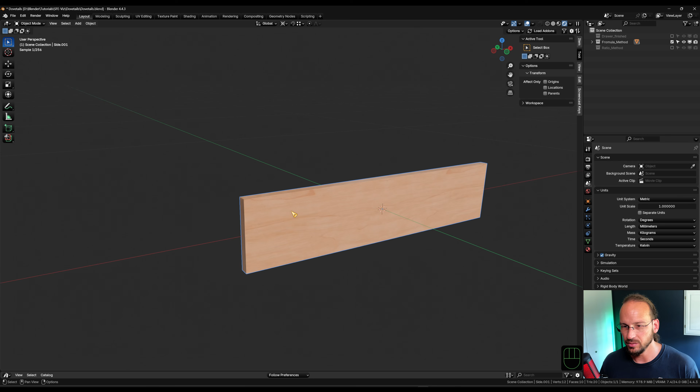So I'm going to get rid of my finished drawer here and bring in a new piece. I'm going to use booleans for all of this, so I've got to make some cutter objects. I'm going to select my piece here and tab into edit mode. And I have a mirror modifier on here.

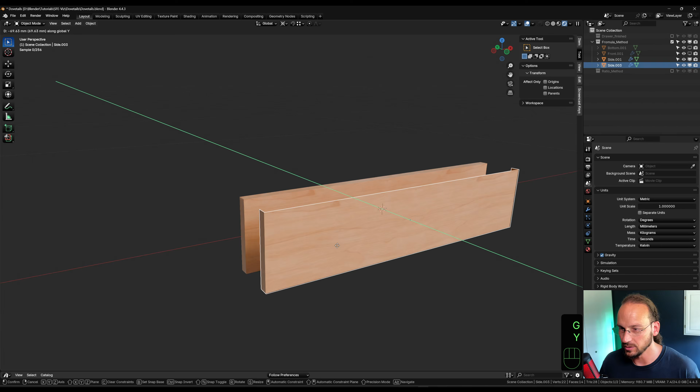That's why it ends right here. So I'm going to select these two faces here and Shift D to duplicate them, P to separate that selection, and go back into object mode. Now in my collection here I have a new object, which I'm going to bring forward a little. That is what I'm going to use as a cutter object. I'm going to get rid of the mirror modifier on here, won't be needing that. I'm also going to go into solid view for the time being.

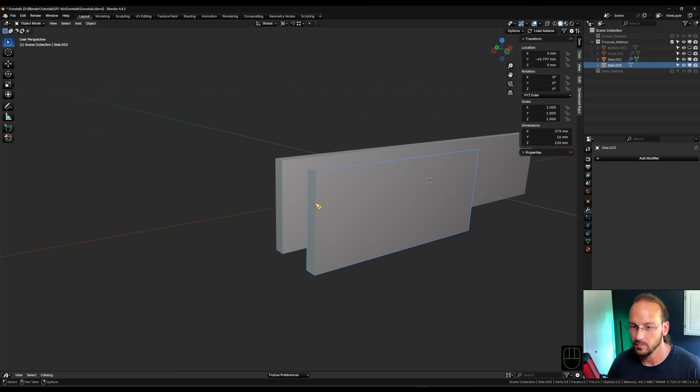Now the first thing we need to do is carry the thickness of our board into the length of the board 3 times. So if we look at our dimensions here, the thickness of the board is 16 millimeters. I'm going to use the outset tool for it. Tab into edit mode, select my face here at the end. Actually, I'm going to go into edge mode quickly and clear the seams here. So in face mode, I to inset, O to outset, equal for the advanced mode, 16 times 3.

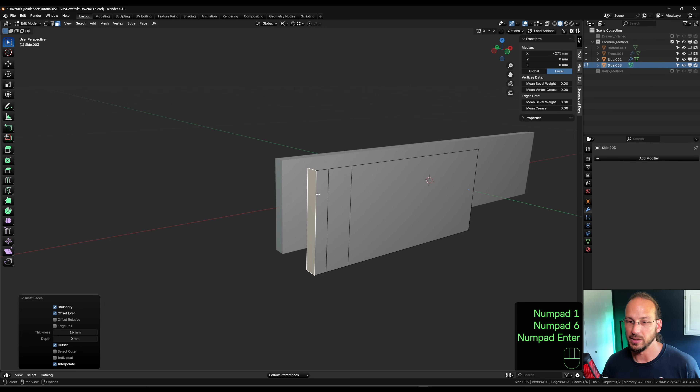Then, of course, I need the simple thickness, because when the other drawer piece comes in here, that is also 16 millimeters thick. So again, I to inset 16, and there is my simple thickness. Now I need to do this one more time for half the thickness, so I, 8, enter. Then I can get rid of that face, and I can also get rid of the vertices at the end here now. So X, delete those vertices.

Go into front view, and now we need to establish 3 things. We need the number of dovetails, we need the number of pins, and we need to know how to divide our piece. So let's start with the number of dovetails, and that's where the formula comes in.

So we need to take the width of our board, which is, if we tab into object mode, 120 millimeters. So we need to take 120 - I already apologize for my glorious writing here - and we need to divide that by 3 times half the thickness. So 3 times half, T for thickness, so that right now would be 16. So that's 8 times 3 is 24. 120 divided by 24 makes 5. So we have 5 dovetails.

The next piece of information we need is the number of pins, which is pretty simple because there's always one more pin than dovetails. So with 5 dovetails, we have 6 pins. Lastly, we need to know how many parts we have to divide our board into. Every pin is 1 part and every dovetail is 2 parts - they're considered split down the middle. So with 5 dovetails, we have 10 parts, plus the 6 from the pins makes 16 parts. That's how we have to divide our board here.

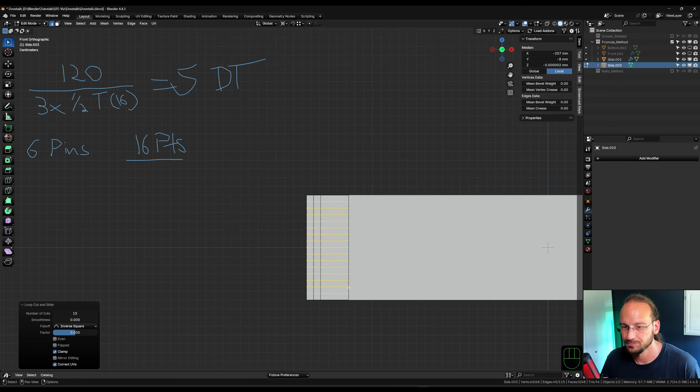And now we have 16 parts on our cutter object. From those, we can now establish the angle of our dovetails. We should do that in front mode because we can use the knife tool for it.

K to activate the knife tool. We know the first part on the bottom here is a pin, so the second edge here is the center of our dovetail. We're going to grab the vertex on the very back, then look at this vertex here, and when it turns gray, when I pull this through, that means I'm snapping to that vertex and continuing the line straight through. That's where I want to cut. I'll do the same thing in the other direction. And now this is our dovetail, precisely calculated.

Now we just need to make that 4 more times. So again, knife tool, K, grab the back here, and when it's gray, cut right through. I'm just going to do that quickly for all of them. And there we go. Now, if this method seems a little cumbersome to you, it is. But the reality is, it's the same in the workshop - just as cumbersome when you do it on a piece of wood.

That's where the second method comes in a little bit. So now I can start deleting stuff I don't need. To get the dovetails on my board, I actually want to keep the pins here and cut them out of the other board. So I'm going to get rid of all the vertices on the back - I don't need those anymore - and then delete all the vertices within my dovetails.

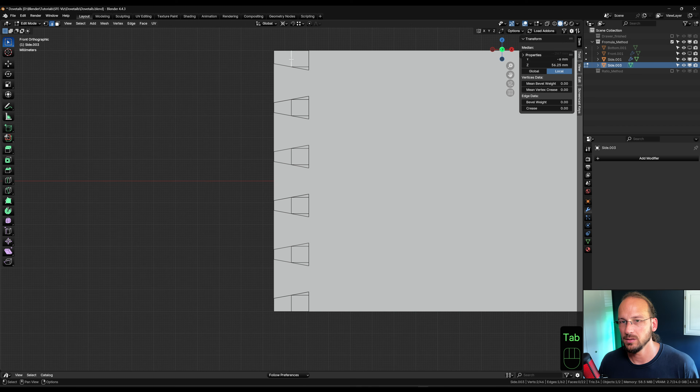So all of these, X, delete those vertices. And then I can clean my pins up a little so the resulting topology is a little cleaner. Control X to dissolve those. So there are my pins that I now want to cut out of my board.

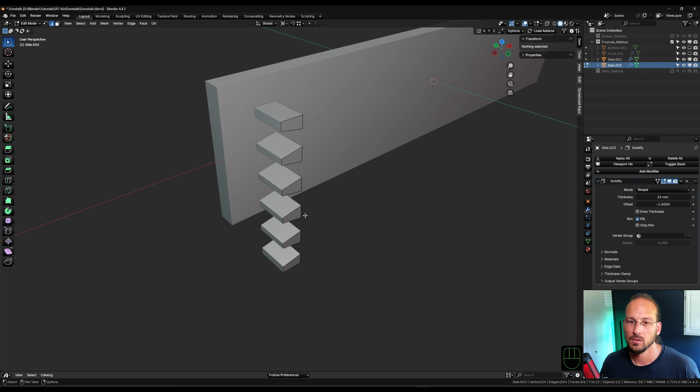So I'm going to add a solidify modifier. I'm going to make sure it's thicker than my board, and I'm actually going to apply the solidify modifier. Then I can G, Y, move it in here. Shift select my board. Control minus on the number pad. And there is my cutout if I switch over to exact.

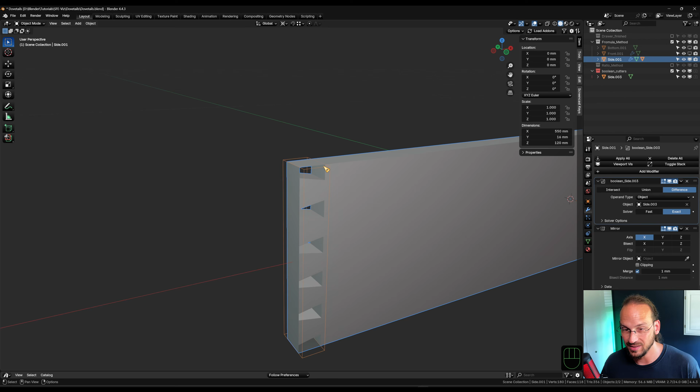Now you can see why I applied the solidify modifier, because now I can go back to my cutter object, go into face select, and select all the outside faces here. Because booleans are always a little tricky in Blender. Alt E, extrude individual faces outwards. And there are my dovetails. Because of the mirror modifier, they appear on the other side too. Just turn on cavity here so it looks a little nicer.

So that is step 1. Now we need to transfer that onto the other board. So I'm going to bring my front in here. And because those dovetails are precisely calculated to the dimensions of my board, they will not change anymore.

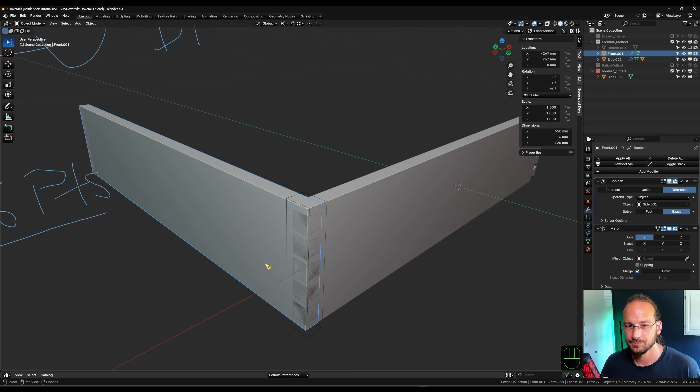And I can apply my Boolean. Control A to apply it. Then on my other board, I'm just going to add a Boolean modifier. I'm not going to use the bool tool for this because I don't want this board to be displayed as a wire or bounds. So I'm just going to add the Boolean modifier by hand. Select my side. Technically it is already working, but you can see we have the same problem again.

If we ignore my annotations here, we still have those thin faces. So I'm going to go back to my side here, go into edit mode and select all the outside faces here. And just temporarily Alt E extrude the individual faces, bring them outward a little. Then we can see we have our pins on the other board here.

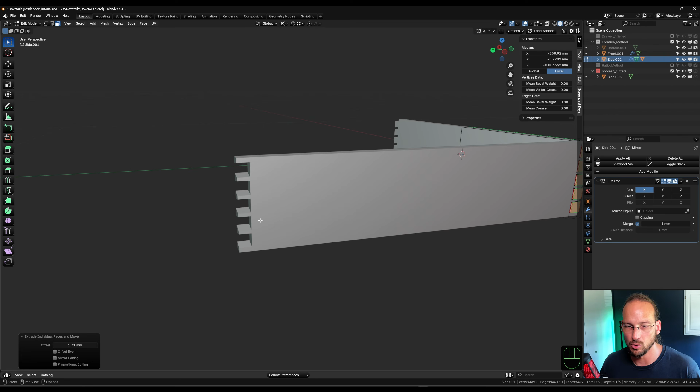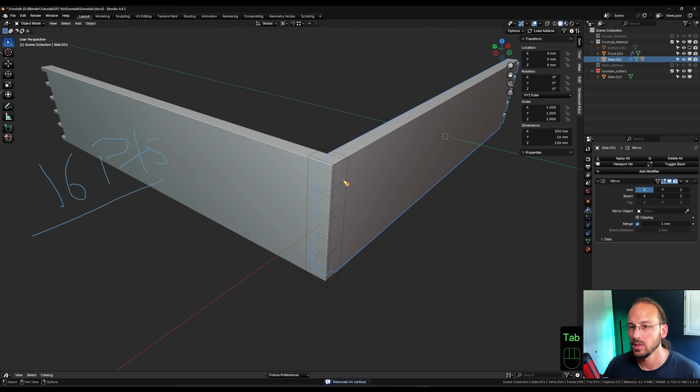So now I can apply my Boolean modifier on the front here, Control A, and then go back to my side one more time, deselect this side, G X, snap them back to the other vertices, select this side, G Y, snap them there, A to select everything, M, merge by distance. And now, if I go into rendered view, I have perfect, precise dovetails on my pieces with this formula here.

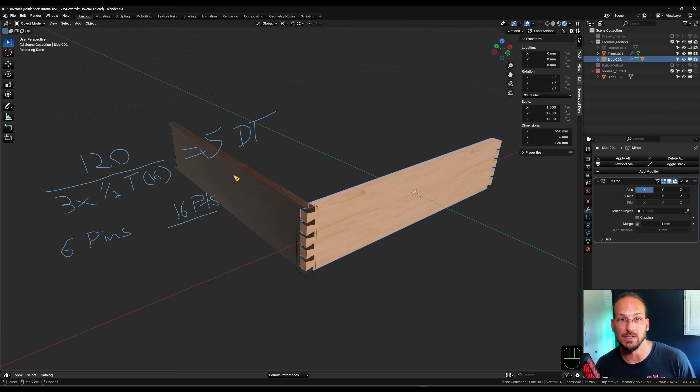The most important part is always establishing how many dovetails you want to have. That's done by taking the width of your board, dividing it 3 times by half the thickness. That way you have established how many dovetails your board will have. So there is method number 1, which is the most accurate one. But because this is so cumbersome, and even in the workshop it is like that, there is another more commonly used method, and that's using a ratio.

So here's the thing about dovetails: they're not just structural, they're also decorative. You can vary the size depending on how much structural strength you need. If you need more strength in your connection, it's advisable to use more and smaller dovetails. But if it's decorative, like for a jewelry box, where there's no strain on the connections, you can just choose to have bigger and fewer dovetails, and that's perfectly fine.

That's also another reason why the ratio method is so common. For the ratio method, you can actually buy dovetail gauges, which you can then use to draw the ratio onto your piece of wood. And of course, we can recreate them in Blender.

I find it easier to work on the head of the board rather than on the side, so I'm going to switch my piece here and get the front in. Then I'm going to create my dovetail gauge first. Let's go with a 1:7 ratio. Dovetail gauges range anywhere from 1:5 up to 1:10. The most commonly used ratios are 1:6 for softwood and 1:7 for hardwood. So let's go with 1:7.

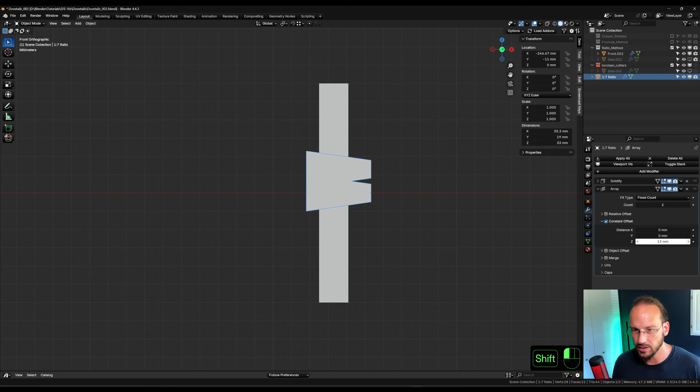And I want to have 2 in that direction. And this is where I'm going to look out that I have this edge and these edges in between roughly the same. And that actually looks pretty good.

I could go by the grid. 1, 2, 3, 4, 5. There we go. That's actually pretty good.

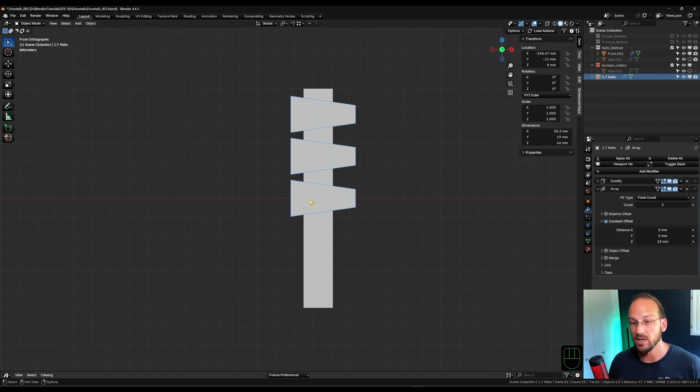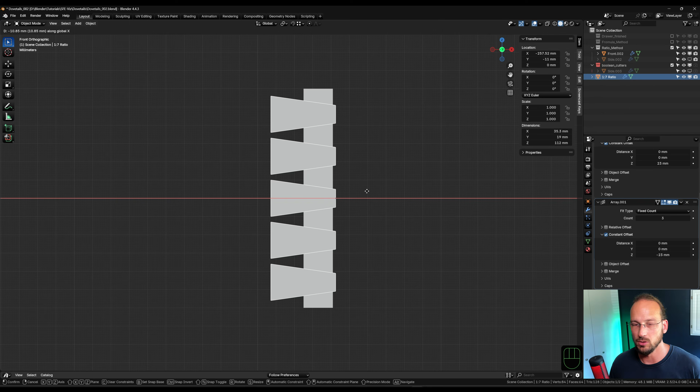And of course we need the same ones on the other side. So I'm going to shift my array modifier, and I'm going to switch the 23 millimeters to minus 23. And there we go. And still I have the freedom to move them out if I want to have smaller dovetails. And it doesn't change anything about the ratio at all. There's still precisely 1:7 dovetails.

Actually, we can move them out a little bit. So that looks good. We have them in the 16 millimeter that we need.

Shift select the front, Control minus, and of course it's funky again. So I'm going to bring the Boolean up to the top. Let's see, exact... yikes. Self-intersect, there we go.

Booleans can be a pain in Blender. You always have to play with all the options here to see if something works. But yeah, there's our dovetails cut into our front.

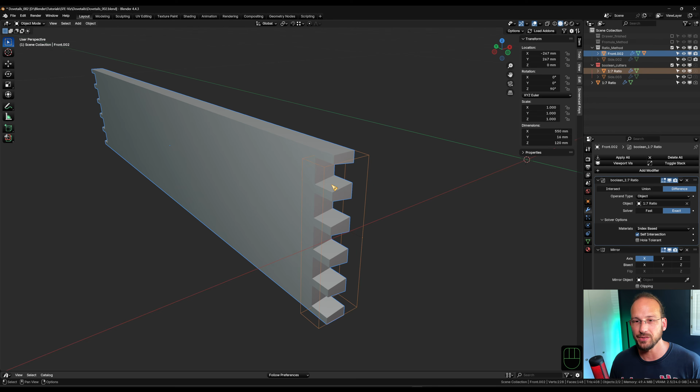Now we just need to cut them into our side again. And this time I'm actually going to make a copy of my front here. Shift D, right click to cancel the movement.

And I'm going to get rid of the mirror modifier, and I'm going to apply the Boolean modifier. Control A.

Tab into edit mode, and I'm just going to select these outside faces here on my pins. And I'm going to press Y to separate them.

GY to bring them out a little bit. Control I, X, delete the vertices.

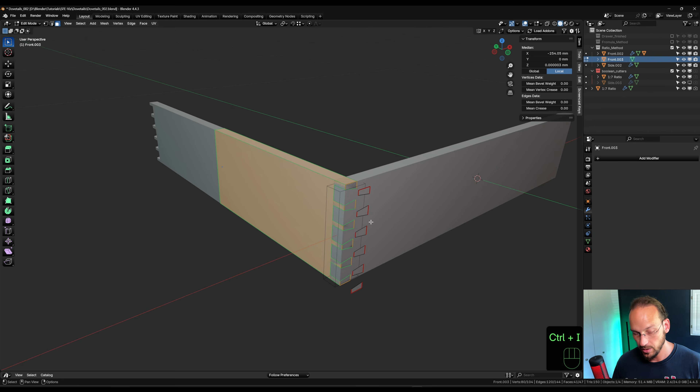So then I can press A to select everything. I'm going to go into edge mode quickly and clear all the seams. Clear seams. And then I'm going to extrude them to something like that.

Go into object mode, bring it into my side piece here. And then I'm also going to select all the outside faces again.

This is pretty similar to what we did on the other one, just that we don't do it on the side actually, but on a new cutter object.

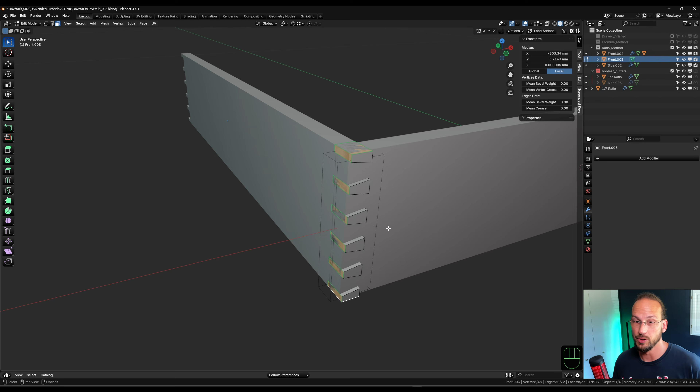Alt-E, extrude individual faces a little. And there we go. Shift select the side, Control minus.

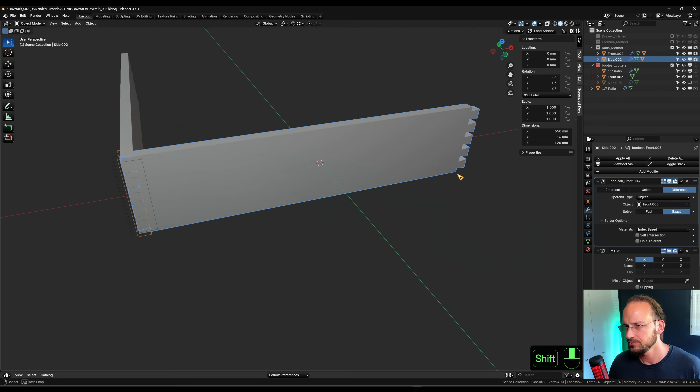And if I drag that up now, we can see we have our dovetails here with a bunch of holes. Let's see... exact, there we go, exact solved it.

Again, you have to play around with Booleans all the time. But now if we look at it in render view, we can see we have perfectly ratioed dovetails in a much simpler way without all the math.

And if you've watched my channel before, you know my math doesn't always math. So I prefer this method a lot. It's a lot faster too.

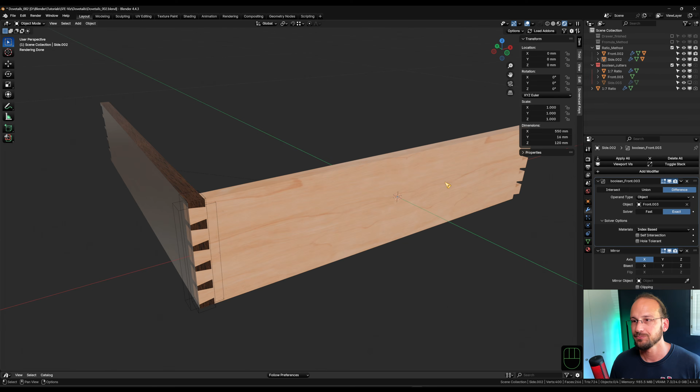And now from here, we could of course apply our Boolean modifiers again and copy our pieces around, create a drawer bottom, and then get something like this.

And when you create the drawer bottom, make sure that it's sitting within the dovetail, because that's where you would place it in real life too.

Now, of course, you could say that creating a dovetail gauge every time you need dovetails is just as cumbersome as calculating them. But the thing is, you can just create the dovetail gauge once and then save it to your asset browser.

If you look at my asset browser, for example, I have 4 saved to it, from 1 to 5 all the way to 1 to 8.

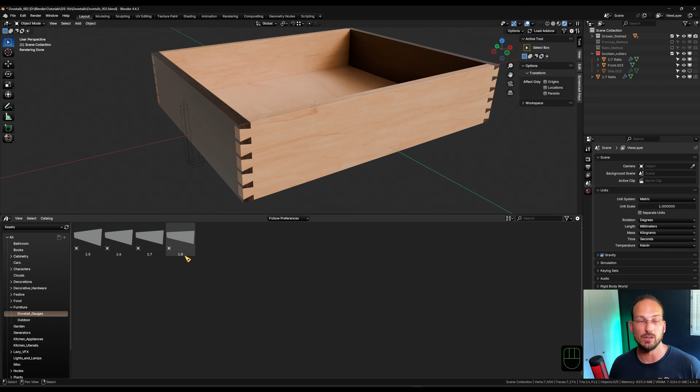And whenever I need them, I can just drop them in my scene and create my cutter objects from there. And that makes the whole process a lot faster and easier.

So there you go. There's 2 methods of creating precise dovetails in Blender. I hope you found this helpful in any way.